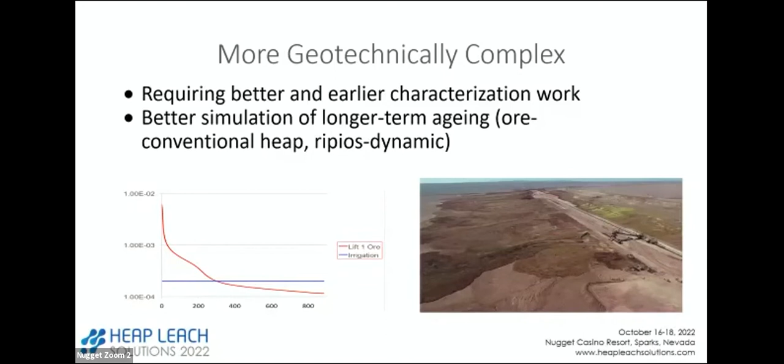Next slide. See, that brain connection's not working. Yeah. So I love as a geotechnical engineer when I get to talk about metallurgy, because I have complete permission to be entirely wrong.

But we're processing a wider range of materials. There's multiple talks this week on nickel. There's a couple of gentlemen here from Finland who have an extremely interesting nickel sulfide heap leach project, and it's polymetallic: nickel, zinc, copper, cadmium, cobalt. I know Dan dabbled with a rare earth project, and I think we'll see more of that. I've been on both nitrate and iodine leaches, and I put a question on lithium because why the heck not? So, next slide, please.

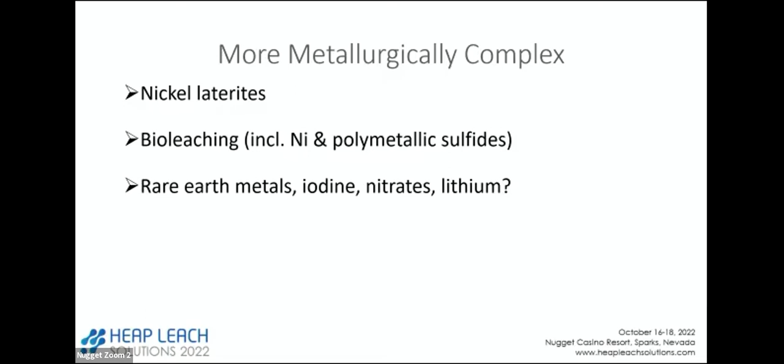And we're also seeing more demanding closure. This is certainly not heap leach specific, but it absolutely affects us: more rules, more expectations, increased oversight and so forth, increasing reliance on, and this is heap specific, heap biotreatment, and less reliance on active closure. The days of just pouring money in a trust fund and that's that, there'll be cases where we still have to do that, but we're being asked more and more to not do that or do that less. Next slide.

The flip side is there's some opportunities here. From an ESG perspective, heap leaching has some real advantages, and we can gain some benefit by recognizing that more overtly and taking public credit for it in our community relations, but also making sure we're designing to optimize that. These were some of the things that came to mind for me. And when the sustainability project was published, they expressly acknowledged heap leaching as a sustainable technology. And I'm very happy to have spent a big part of my career on that sustainable technology.

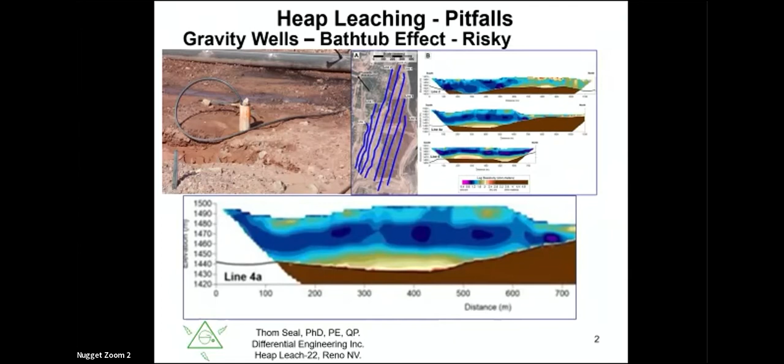If I can get the next slide to come up here. Here we are. Whoops. A little delay there.

Looking at the geostability of a heap, we know that when we have a solution buildup, there's two factors that maintain slope stability. Well, I'm not a real specialist in this area. I've observed that when you have a solution there, your friction factor goes to a minimum. It's like the difference between driving a car on a dry pavement versus during a rainstorm. When you go to put on the brakes, it's just not going to have the same friction factor.

Well, this fluid in between the rock particles will act as a lubricant. And in addition, it'll add extra weight to the column of material above that plane. There's also cohesion between the different rocks. And when you lubricate that as well with solution, you're going to take that cohesion factor to a minimum.

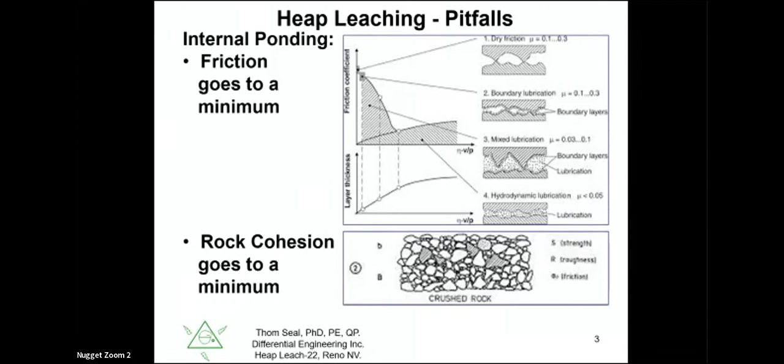Now, the geotechnical engineers know exactly how to calculate this all out, but I wanted to point out that this is a natural physical phenomenon that exists in our heaps, and it's something that we must understand and manage. One of the first indicators that we have a buildup of head, or the bathtub effect, is we're going to get seeps on the side of the heap. And this is a real good indication we have some problems for solution flows. Either we're adding too much solution or we have a compaction layer underneath that needs to be addressed.

This also can be accompanied by cracks along the crest or heap pad movement. This can result in failures for your side slopes. Now, this is not nearly as much of an issue when you're dealing with valley fill, when your heap is pressed up against a mountain. But again, your crest, which faces towards probably your process ponds, etc., that's where you have a potential for failure. And these failures can be catastrophic.

There's a lot of rumors going around that several heaps have moved and some of them have failed over time. Now, we've had a lot of tailings dam failures in the last 10 years, and Dirk can probably address that these really can hit the public press and give us bad PR. So it's something we really must address and manage and understand.

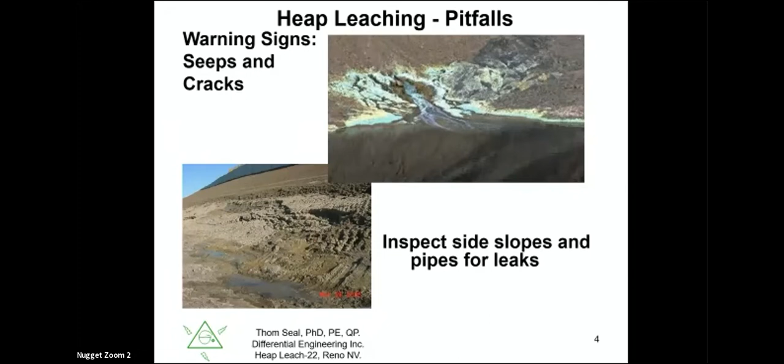Okay, here's an example of a couple failures that have been on heaps that haven't been real large, but significant enough to cause spills, go over your liner, out of containment. There was one at Newmont back in the 90s when I was there that was very costly. We had some cyanide detoxification we had to perform, etc. But it didn't really hit the press very much, and it was managed very well. But it's something we want to avoid in future operations.

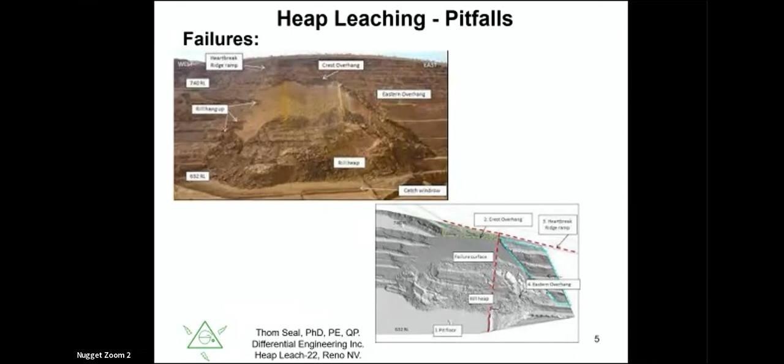Okay, so I'm going to talk about closure. And, you know, this is not a laundry list. There's even more, but the big ones are, you know, what are the drainage rates over time? We know that obviously it's going to drain, and probably most of the high drainage rates will be gone within the first year, and then it'll get down over the next 5 years into a lower asymptote that at some point will start to approach the net infiltration rate.

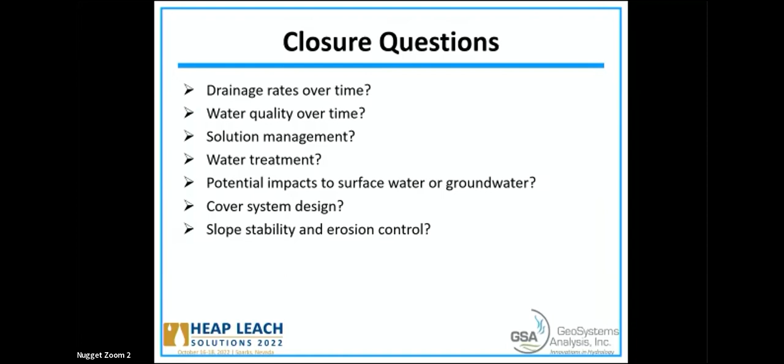What's the water quality over time? What's solution management? How are you going to handle that initial drain down? Do you need to treat for water? Do you need to treat for water quality? Are there potential impacts, surface water, groundwater, cover system design, slope stability, and erosion control?

So, you know, Thom touched on this briefly already. Run-of-mine heaps as well as crushed agglomerated heaps can be pretty complicated, and you get solution buildup. You get all types of heterogeneity between these systems. There's preferential flow, there's preferential airflow, there is stagnant flow where you have a solution that's captured in pores that are flowing very slowly, and they serve as a reservoir of water quality contaminants. So they're really complicated systems.

And in general, we need to be able to quantify those different components of the subsurface flow system. Matrix flow is going to control your residence time. In some of these big heaps, it can be hundreds and hundreds of years, and that's going to control the geochemistry. At the same time, you're going to have a lot of preferential flow, even in a crushed heap leach. It's going to flush out, and water quality is going to change over time. You have to be able to understand that if you're designing a water treatment plant.

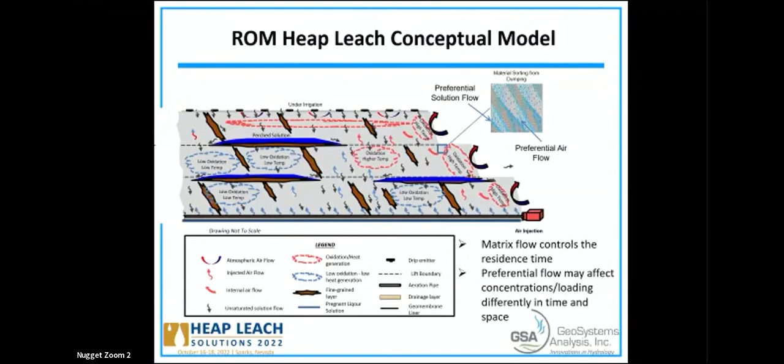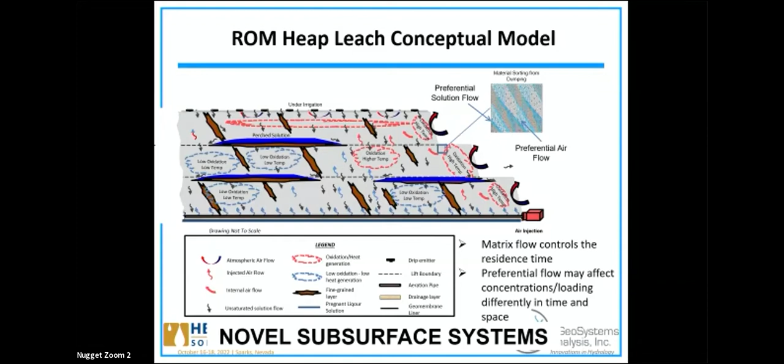And depending upon what the material's like, it can change it in different ways. We've monitored outfalls on heap leach and waste rock dumps, and depending on what the material's like, you might see in the rainy season that the water quality concentrations will go down. Sometimes it will go up. So these are what I call novel subsurface systems. There's really nothing in nature like these systems, and so we have to think about that, and we have to keep advancing the tools to understand these subsurface systems.

Cover systems, there's a lot of work that's been done on them. They are not a magic bullet. They will help control the infiltration into the waste, but all cover systems, water comes through them. And the other thing to keep in mind with heap leach facilities, they're already at a wetted phase, and they're at field capacity. So whatever goes in as net infiltration is going to very quickly come out.

This is a graph from the Richmond Hill mine where they have about 20 years of monitoring data. On the top of the graph is the precipitation rate by month, and the bottom of the graph is the flow rate. And this little green line that you also see, that's some model output. So every wet season, and it's primarily in the wintertime, there's a lot of snow. Springtime, you get this huge flush, and it's extremely rapid. You see a very rapid response within weeks from the snow melt on the outflow.

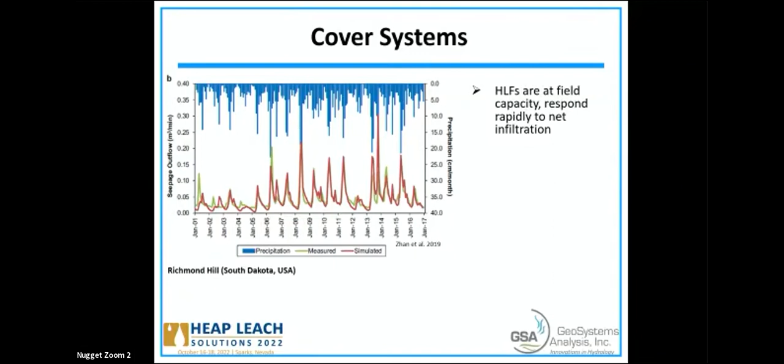And so in this particular area, what you can see is the flow rate early on is quite low, and that increases over time. So the cover system also changes. So you need to understand those types of things. And even though this was a low permeability barrier layer cover system, it's still leaking through at about 30% of the net infiltration rate. That's water that you have to deal with. Semi-arid climates, you might be able to get down to 1 to 5%.

And what are the optimum cover systems, and what's the balance between water quality treatment? These are questions that every mine has to take a look at and go through an alternatives analysis and decide how to close these facilities.

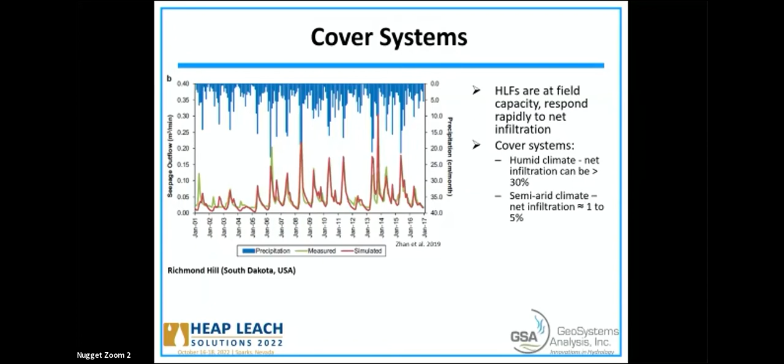I just want to show this real quick. I already talked about this very rapid response. In the modeling we did, basically we showed that 40% of the infiltration that was going through was coming out quite rapidly. You can associate that with preferential flow. The rest came out more slowly, matrix flow, stagnant flow, then contributing to the water quality as well.

This is another study we did, and this looks at, I must have had something in there in the past. There's a phantom PowerPoint there, but it has a life of its own.

But basically, this shows a barrier layer, and this particular design is a barrier layer with a drainage layer and then a topsoil vegetation layer. On the y-axis is the net infiltration rate that's coming through, and on the bottom axis is the hydraulic conductivity. As you have a higher hydraulic conductivity, obviously more comes through. But what this basically shows is that even if you have a clay layer that's around 10 to the -6, there's still quite a bit.

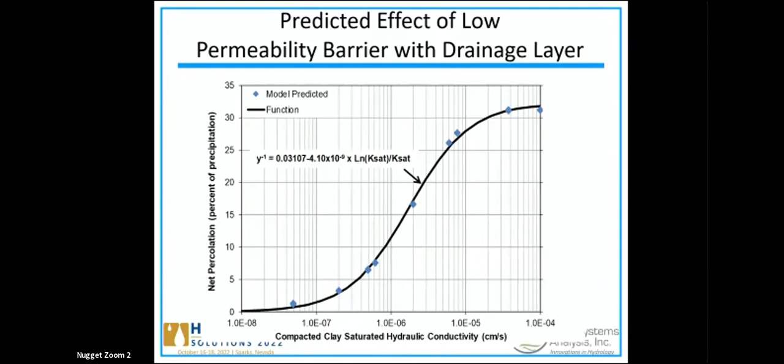There's 10 to 15% of the precipitation that's coming through this cover system. And so if you want to use a natural barrier layers cover system, you have clay on site, you really need to get down in the neighborhood of 10 to the -7. Now, this is the climate from the Andes. It's quite wet, 1,500 millimeters of precipitation per year.

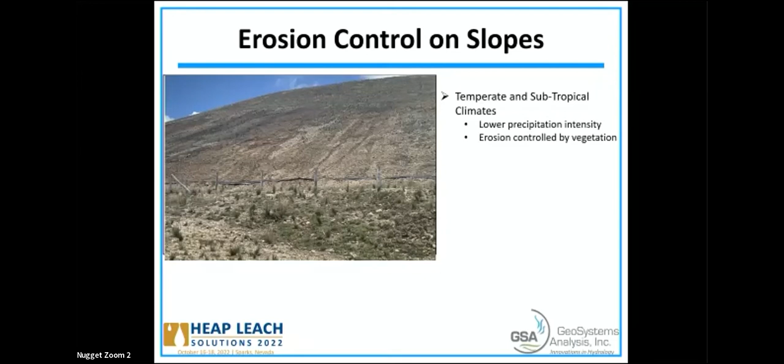They get a lot of rain, but they don't have monster 2-inch 1-hour storms like we do in the Southwest in the United States. And so with those types, and here's an example, this is a mine in Peru as well, poorly vegetated, massive erosion. And unless you've characterized your topsoil and you understand how to revegetate it properly, you're going to end up with big problems. Same site, there's other areas that are beautifully vegetated.

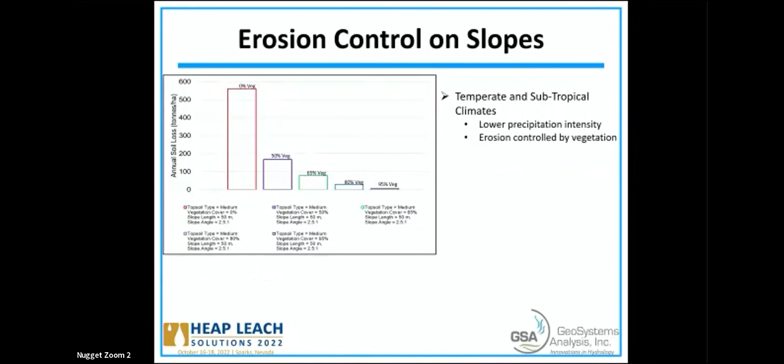This thing was on autoplay.

Down by Tucson. So we had a cover system design where we put down 30 centimeters of alluvium, and then we followed it with a rock armor because we knew the alluvium was highly erosive. Well, we saw how highly erosive it was. We had two 2-inch storm events within a couple of days of each other, massive erosion. And in these semi-arid climates, it's really the rock fragment that is controlling the erosion. It's not the vegetation. So don't think I just vegetate and it's going to take care of it. You have to consider the rock.

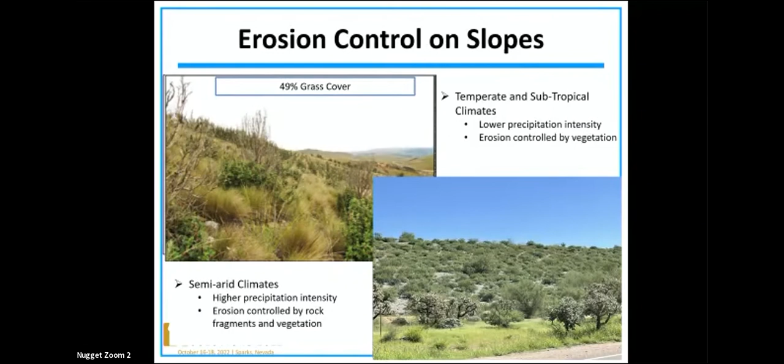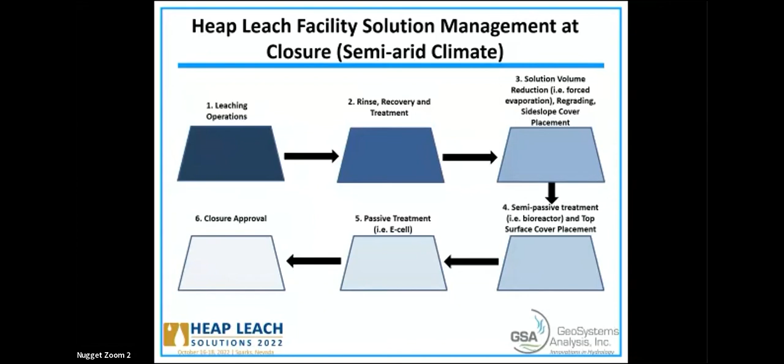And then water management. Solution management closure. This is a big deal because you're going to get a big slug of water. How do you treat it? How do you reduce it? And then eventually in a semi-arid climate, you may be able to get it down to a low enough flow rate. You can send it to an evaporation cell. How well is the evaporation cell going to work? What's the proper design? If you have a 15-foot deep evaporation cell, well, guess what? The bottom 5 to 10 feet are not evaporating. They're a holding pond. Okay. So these are the things that we need to consider. And so I'm just throwing that out there.

And because these novel subsurface systems are so complex, you can run some samples in the lab, but you really need to get out there and monitor. You need to monitor what's happening in drain down. You need to monitor under operations and when you take things off, so you understand what's happening with the flow rate. You understand the water quality. Solution management, you need to plan for the worst. Okay, and specifically, I'm talking about water quality.

I didn't mention PAG material, but there's a lot of heap leaches in gold that are running alkaline systems, but they have PAG in the rock, and over time that could go acid, and then you have an acid heap leach. You might as well be leaching copper at that point, because you have to deal then with the acid. There's a lot of unknowns. What's the long-term water quality? One of the big questions we're looking at right now is we're working on a site where they have a number of heap leach facilities, and they've all turned acid. And the question is, even though we put on a low permeability cover system, there's still a massive amount of water that's going to need to be treated. So does it make sense to spend more money on a cover system, or do you just need to bite the bullet and treat forever?

And we don't know what the long-term water quality is, because even though you might reduce the infiltration rate, the water quality could get worse because you're not flushing as much water through. These are unknown questions. Long-term cover system efficiency: you have changes in hydraulic properties, you have changes in vegetation, you have degradation from erosion.

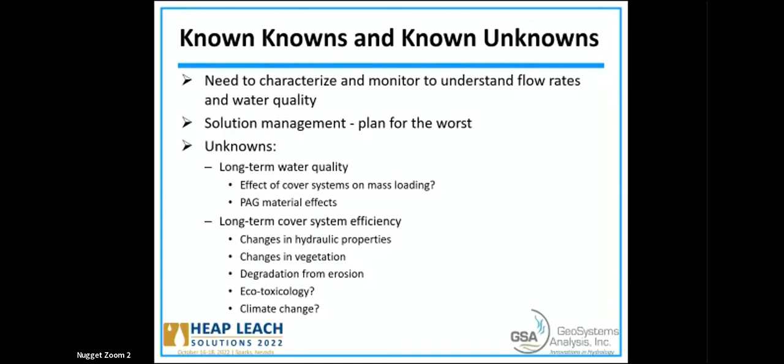I have just a few comments about governance. And so this is more of a thought piece and maybe a bit of background to let us think about heap leach governance. I know that Freeport has a governance system established for heap leaching. I don't know the details of that. And so if anybody from Freeport wants to share that, I would appreciate it. But I first want to talk a little bit about the failure of systems.

If you have not read this book, Drift into Failure by Sidney Dekker, published in about 2012, it's very well worth reading, and it's worth rereading from time to time. It's well written. Dekker is a professor at Griffith University in Australia. He's also a certified Boeing 737 pilot. And so you'll see some of his writings actually coming up in some of the Boeing 737 MAX, as well as earlier Boeing and other crashes. He says there are 5 elements we've got to pay attention to when we look at the failure of systems.

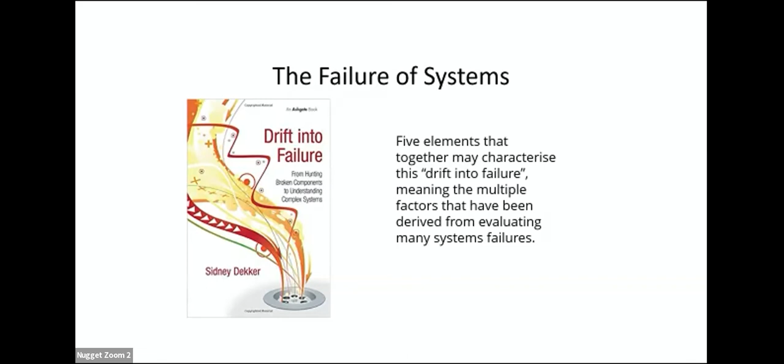Constraints that impact the decision making. He says we've got 3 boundaries: economic, safety, workload. And if the economic pressure wins, it may result in borrowing from safety to accomplish the efficiency. And so let's be very careful of that. Second one is a series of small decisions can have a very large impact. These are small, unrelated decisions made by different groups at a site. Misunderstanding of interdependencies. System conditions that are interrelated can have highly significant impacts on the outcome, but we need to understand how those interdependencies work.

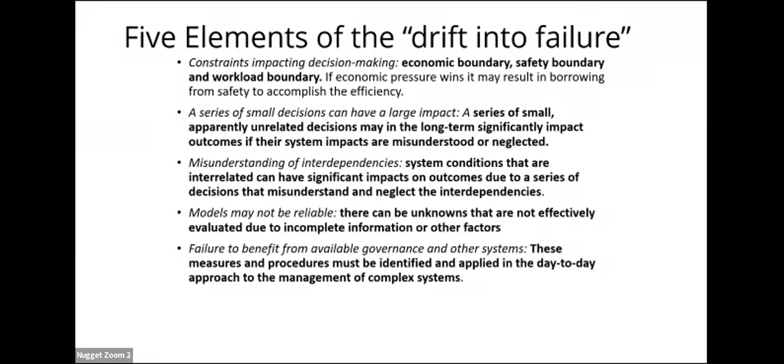Models may be unreliable. There can be unknowns that are not effectively evaluated due to incomplete information or other factors. And then the importance to look at the benefits from available governance and other systems. So really, measures and procedures must be identified and applied in the day-to-day approach to the management of complex systems. And he goes through all of this, and then he says, so what have we learned in our research?

And he says, the key is diversity. Safety critical organizations are complex, adaptive systems. These organizations must pay attention to diversity. With diversity, a system has a larger number of perspectives to view a problem with a larger repertoire of possible outcomes. Plus, the diversity is not only diverse disciplines, but also diverse genders and all the diversity we have.

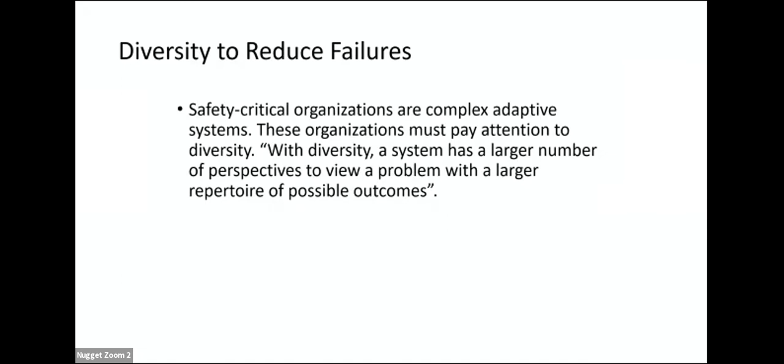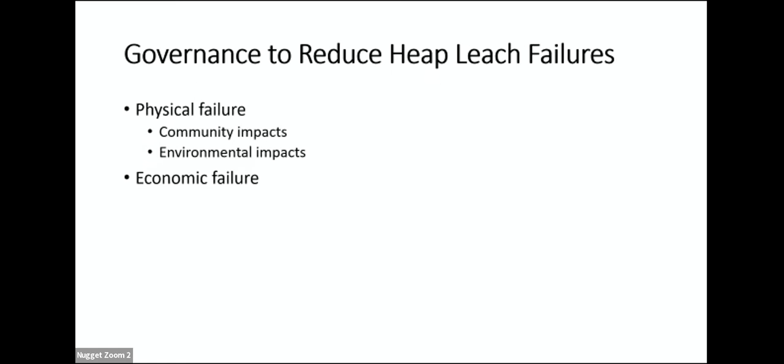And it struck me over the last day and a bit, just how interrelated things are in terms of heap leaching between metallurgical work and what I would call physical engineering: stability, geotech, hydrogeology. These are closely related, and it's really diverse if you think about it. So if we go forward, we've got to look at what kind of failures we could get. To me, it looks like we clearly can get physical failures, which can lead to community impacts, environmental impacts, and Thom, you addressed some of that. But an economic failure is a failure in a heap leach. And so how would we address it?

And so some ideas around diversity. I'm back at the ESG issue, Mark. I'm saying back at the ESG issue: environmental, community, social aspects, management and governance, very important. Design, construction, operation, and monitoring. We think we know how to do it, but we need to pay attention to the metallurgical material behavior as well as the physical material behavior.

The places where we have the most difficulties are combining environmental, community, social, management and governance, and the engineering side. People would look at it as stovepipes, silos, but that integration is where the challenge is. And quite frankly, this is where I think we're all going to be as we move forward to the future of heap leaching. We're going to have to pay attention to all of these issues. And that's all I have.